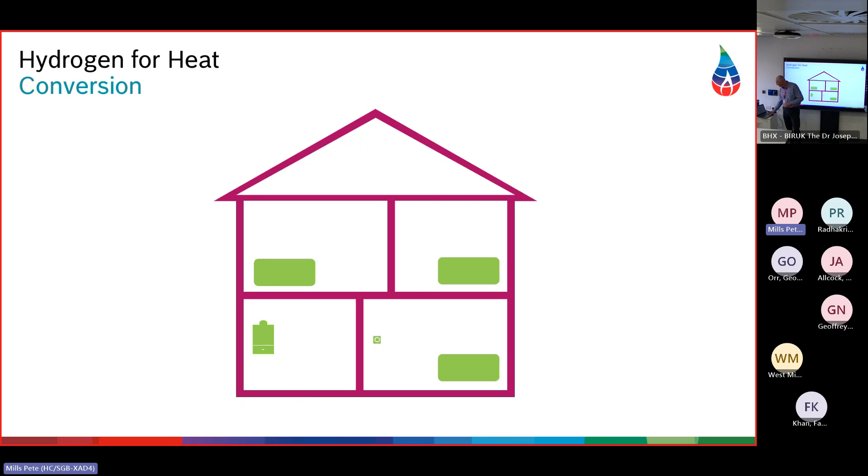Now, if we had a technology that kind of got around all that, then it's sort of interesting to look at if we didn't need to do that massive change. We've got challenges as well as we step away to look at the wider network and what we need to provide in energy terms. Now, this is a little jerky, but hopefully it's going to get there in the end.

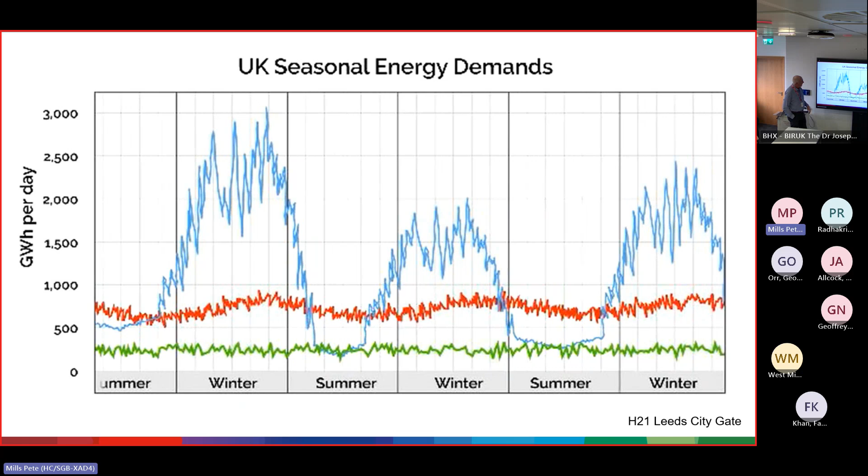This is essentially multiple years of energy requirement for the electricity grid, which is the red line here, which you can see is fairly stable. There's not an awful lot of seasonality, really. It's a little bit of swing, but it's not a great deal. In comparison, we have these massive peaks and troughs on the gas grid. Huge seasonality, which the gas grid just copes with.

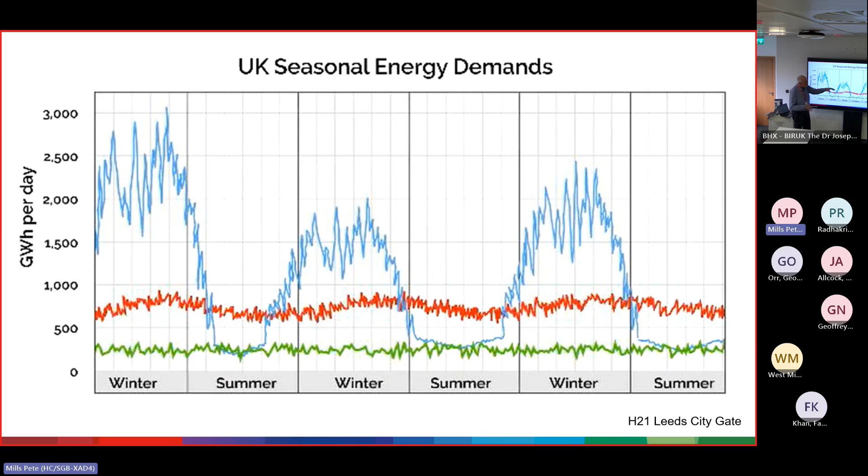When the beast from the east hit us, it would actually be off the graph. It was, I think, 3,800 gigawatts at certain stages, and it was reckoned at times 90% of the country's energy was coming through the gas grid because all of the CCGT turbines were kicking in to bolster up the electricity grid as well. So we've got to have some kind of capacity to deal with this. We've either got to shave off these peaks, or we've got to replace this buffering capacity that the gas grid gives to us with some other technology, which is all cost.

And we have challenges at a local level, at the street level, we have similar kind of peaks and troughs. We have typically these peaks in the morning when everybody gets up and they want their house warm, and then at the end of the day, they come back and they want it again, these big peaks and troughs. Again, gas grid copes with it. They have all sorts of strategies like line packing, where they actually pack more gas into the local grid, and that copes with these peaks and troughs.

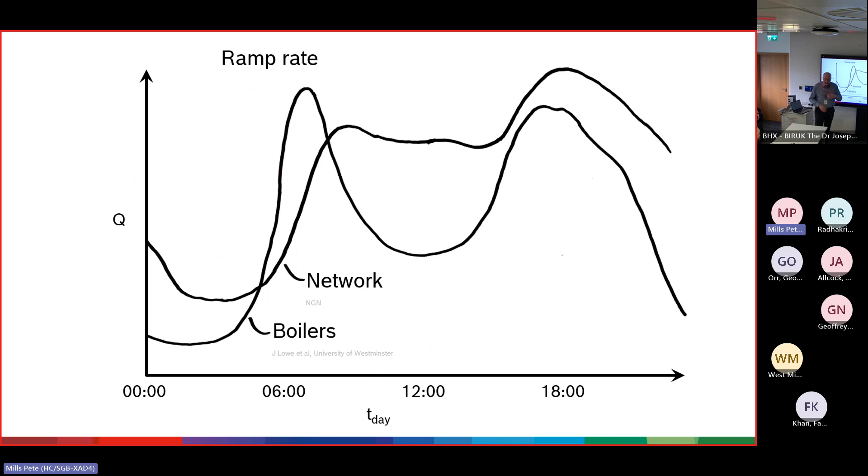So a lot of the distribution network operators on the electricity side are really still a bit unsure about what's coming on to their grid at a local level. How many heat pumps, how many EVs are going to come on to my local grid? And so this again is acting as a bit of a barrier, because particularly for us on the commercial side of things, it's becoming quite a problem in certain areas to actually get the connections you want. And if you're looking to go off grid and maybe you need 3-phase, then that can be a real challenge, and that can scupper your project before you start. So again, we've got to tackle this problem if we are going to be able to get really forward with heat networks.

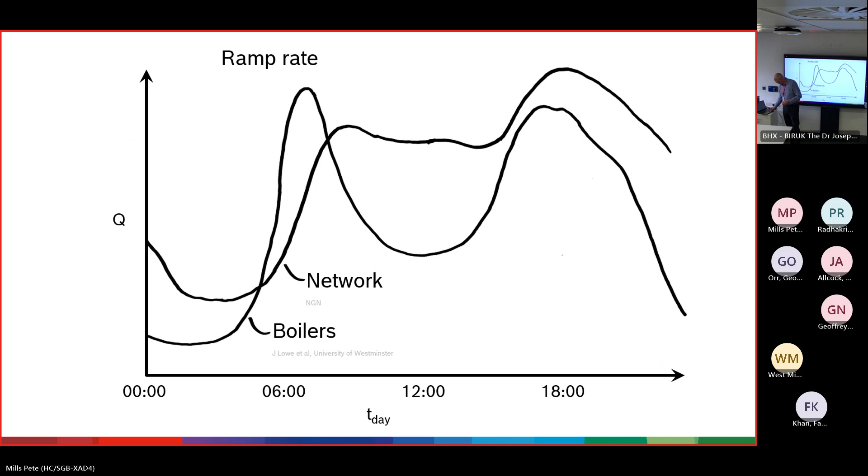Now, I want to just go back in time a little bit. Around 2013, we had the first heat strategy documents come through from government. And it was pretty much an all electric future that document set out. And there's no question about it, it put the gas industry into a bit of a spin, thinking, well, what's the future for the gas industry? We've got this £40 billion worth of asset in the ground. What are we going to do with the future?

Just as a side note, if we wanted to switch it off, it would cost us around £74 billion to decommission the gas grid. That's without thinking about pensions and things like that for people working on it. So it's a massive cost if you just want to switch it off. But anyway, the gas side was in a bit of a spin, thinking, right, what's the future of the gas grid? Could we do anything? And so the obvious thing was, could we have a decarbonised gas of some sort? And hydrogen is the most obvious way to do that. And some of the earliest projects, and this one here, H21, is still a live project.

This still goes on, but this is one of the earliest ones. It was thinking about, right, could we look at a city and actually convert the gas grid across to hydrogen? And so they chose Leeds for a number of reasons, really. It's the 3rd largest city in England anyway, so it's quite a big thing. It's quite sprawling, and I think the thoughts were, well, if we could tackle Leeds, we could probably do a lot of other cities. We could roll it out.

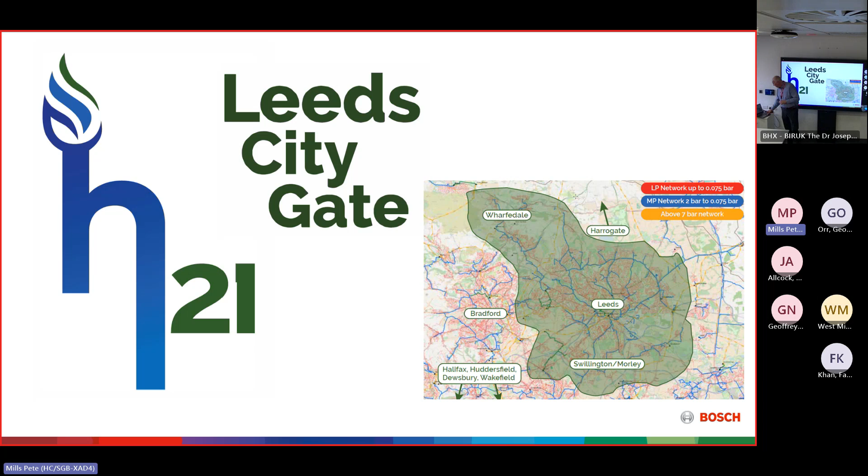So what they had in mind was to take the existing system and put in a new kind of local transmission system with hydrogen. It would take its hydrogen, and this is a controversial bit, I know, but it would take it from a steam methane reformer plant. So this is what we call blue, not where we want to be, not the best way of doing it, but kind of a pilot project to see whether you could do this.

So essentially what goes on here, you take methane, you split it into hydrogen and carbon, you capture the carbon and you sequester it off into some caverns in the North Sea or decommissioned gas infrastructure out there.

Now, the other thing that was useful for the Leeds area was there's some salt caverns out towards Hull, and they could use this as a kind of storage system, because if you're going to do a smaller discrete network, then you haven't got that massive buffering capacity that I was talking about earlier on that can soak up the peaks and troughs. So you need some kind of storage facility.

And so the caverns that they've got there would give something like about 40 days' worth of capacity. And so if something like the Beast from the East hit you, you could cope with that and get over it. And it also allows the SMR plant to just kind of run through the summer, building up capacity, and away we go. So this is still a live project, like I said.

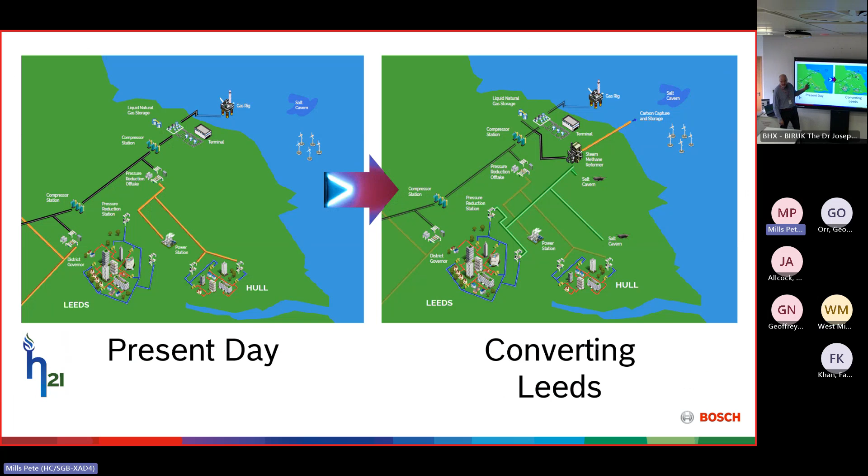What was that project called, sir? Sorry, the name of the project? Leeds Citygate H21. H21. Yeah, you just put in H21, it'll be there.

So what we're talking about here essentially is a conversion. And we've got a precedent for this because there was a conversion in the 1960s and 70s across from Towns gas, as it were. And interestingly, Towns gas actually had a very high hydrogen content, something like 50–55% hydrogen. So this is almost a sort of back to the future solution here. But they converted across from Towns gas to natural gas at the time. Massive undertaking.

But it has to be said that it's a simpler proposition then. The entire gas network was owned by British Gas. It wasn't split up as it is now. And appliances were a lot simpler. It was mainly cookers and gas fires and the odd water heaters and things. There weren't many boilers and stuff like that. So it was a lot simpler. But it does give us a couple of useful precedents.

And the first thing is that the way they did the conversion was actually district by district. Now the gas network is still set up in this way. So you can turn off certain areas, you can do a conversion in an area, and then you move on. So it's kind of a useful thing to understand.

And the second thing that's quite useful is that the way they actually did the conversion was that they just came in and changed a few components on the day. So in the early days, that was burners, injectors, things like that, and they could do it on the day. And so that made the whole thing practical and doable. And it's useful for us to remember how that was done, because that gives us an idea about how you could do it if you so wanted to.

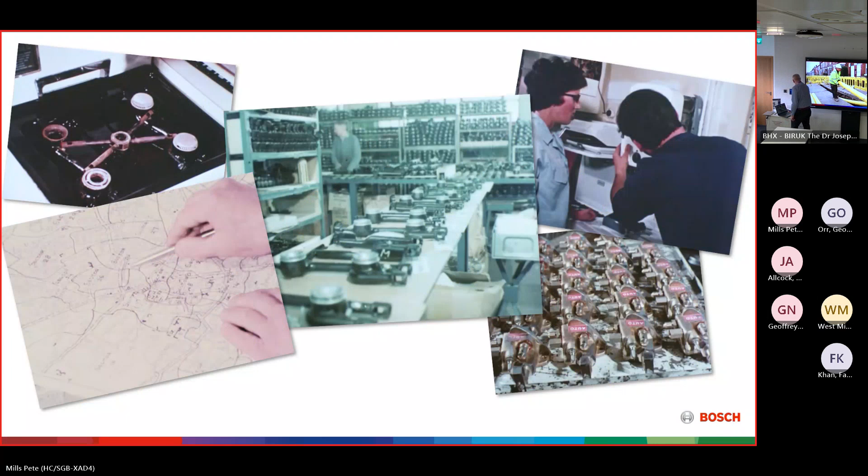One of the other things we've got in our favour in the UK is that we've got one of the most extensive gas grids. Probably Holland is the nearest to us, but they're still some way behind. But one of the key things that makes it quite interesting for us to look at is that we are well into a programme of replacing all of the old iron mains, which wouldn't be suitable for hydrogen. So the yellow PE pipe you see going in is suitable for hydrogen.

And that programme is, I think, around 70% complete now. So there's still a bit to do, but it's 70%. And so that gets us really from the street into the house, pretty much ready for hydrogen, other than the meters, which would have to be changed. But gas meters, like other meters, are part of a replacement cycle. So you can imagine you set up a replacement cycle ahead of doing conversion and you get the right meter in there ready for when you need it.

And so that gives us a significant advantage, because if you didn't have this, you'd have all the extra cost of having to do this on top of trying to do a conversion. It'd probably be out the window.

So where we are today, really, I think we know that we are going to have a hydrogen economy of some sort. The question is really how big that hydrogen economy is. We know that we're going to need it for certain areas like industry, where you need high temperatures, definitely. And if you look at the latest government hydrogen strategy, it's already outlined that that really is the solution for industry. So you could say, well, maybe you'll have clusters of hydrogen, a bit like the cluster that's going on in the northwest, HyNet, where you've got some industrial sites that are going to benefit from that.

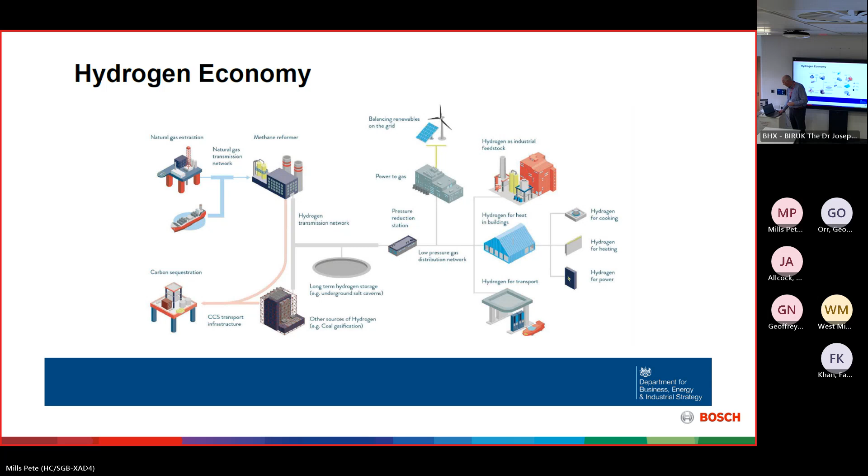Now, if you're going to do a conversion, you've got to create your hydrogen. And I think this is where a lot of the controversy has been over the last year or so, really, about how much extra capacity you need from wind turbines to do this. And you will see all sorts of information out there that leads to massive figures. And I'd like to say this is finally being put to bed by the recent studies that have been done, very recent.

And really, this has looked in depth at how you do this, because the thing to say with this is that there is an efficiency penalty. If you want to do hydrogen, there's an efficiency penalty. It's not as efficient, as I said in my statement at the beginning about heat pumps. That is the most efficient way to do it, no question about it. But if you can't do that in time, then utility has to be considered. Otherwise, you're never going to hit your targets. So this is the penalty. This is what it would take to do it.

If you wanted to do the entire gas system as it is today, we've got something like 22 million homes connected to the gas grid. If you wanted to do the entire thing, you'd need about 80 gigawatts to do it. Well, what this particular study considered was that we are probably unlikely to do the entire UK population of gas connections. We are expecting there to be significant numbers of heat pumps.

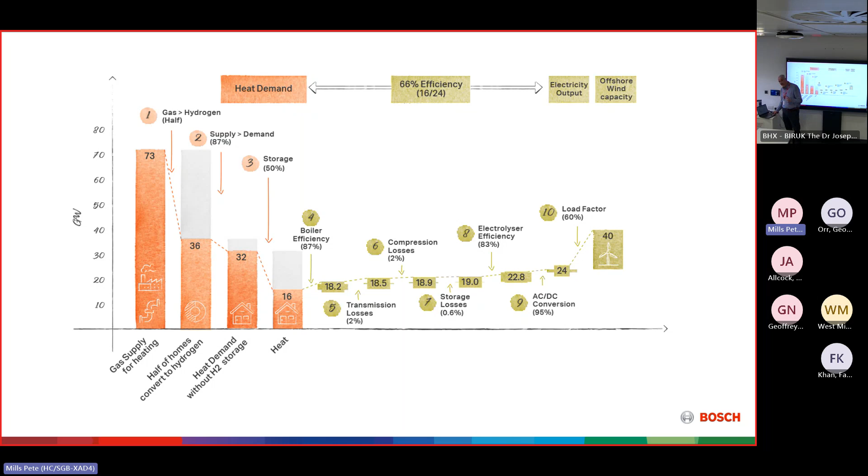Now, that contrasts with some of the early statements on this, where the figures were something like 385 gigawatts, but the incorrect figures have been used. And there are a lot of people out there that are very anti-hydrogen. So I totally get it, we want to go the most efficient route. But we need to stick to the right figures. Otherwise, we're not going to be informed properly in what we do.

So where are we with hydrogen production in the UK? Well, these are some sites that are actively going on. The British Energy Security Strategy initially committed to 5 gigawatts of hydrogen by 2030. When the Ukraine crisis kicked off, they doubled that. They went to 10 gigawatts. So that's what they're committed to at the minute. And half of that will be electrolytic, so it will be green hydrogen.

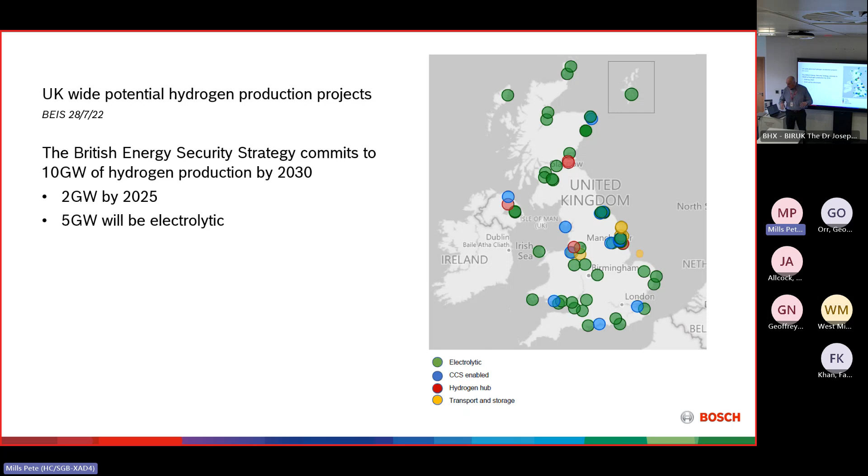The target at the minute is to get to 2 gigawatts by 2025. So you can start to do some things. These are early sites, and you can see the capacity is starting to build up. And we're going to need this whatever we do. Whether we decide to do a transition or not, we will need this. And there are a lot of others, too many for me to put on here, but I just wanted to pick this one out, which I think is very significant.

The gas industry has got a fairly well advanced, mature program for how it would do a transition across to hydrogen if it needed. And one of the key elements of this in the early stages is Project Union, which is really a kind of hydrogen backbone to get hydrogen distribution across the various areas of the country, but also potentially through Bacton, which is where I live, across to Europe to hook up with their hydrogen network.

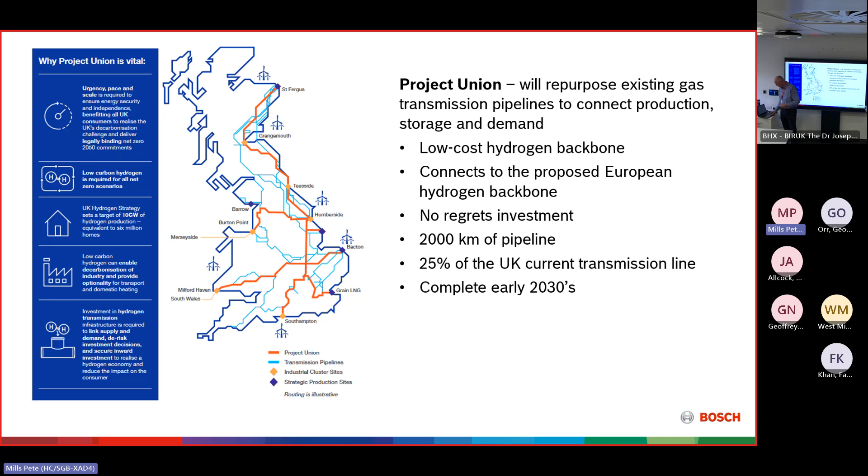So, some figures on here about what it's all about. But what they're really saying is that this is a kind of no regrets investment, because we will need this come whatever, because we will need clusters, so this is good investment. So if you look up Project Union, there are a lot of these different things going on, too many for me to mention. But the point is, the gas industry itself is quite advanced in getting down the road with this, so that if there is a decision, it can react to it and do what it needs to do.

Okay, I want to come away from the network side for a minute, because the other thing we need here is some appliances, don't we? If we're going to do this, we need some boilers and cookers and whatnot. And so Hy4Heat, the program we were very much involved with, the reason for it really was to try and give government the information it needed to see: was this even possible? Could we do this? Is it safe to do it? Can we get appliances? Can we do meters? Can we do all the stuff that we'd actually need?

So this program's actually finished now. It started back end of 2018, went right through COVID, and still managed to keep on target amazingly. It was split up into all these different work packages. There were things here to do with standards. So the Institution of Gas Engineers made a standard for hydrogen quality, known as H1. BSI created PAS 4444, which was a certification standard so that manufacturers like yourselves could create appliances certified properly that would then go on to proper community trials, and that's the next stage.

We were involved with work package 4 mainly, where we produced prototype combi boilers, system boilers. We were also involved with work package 5, which was commercial. The only company that actually demonstrated a commercial cascade of appliances for that area. And then work package 6 looked at industrial. That was mainly a desktop study.

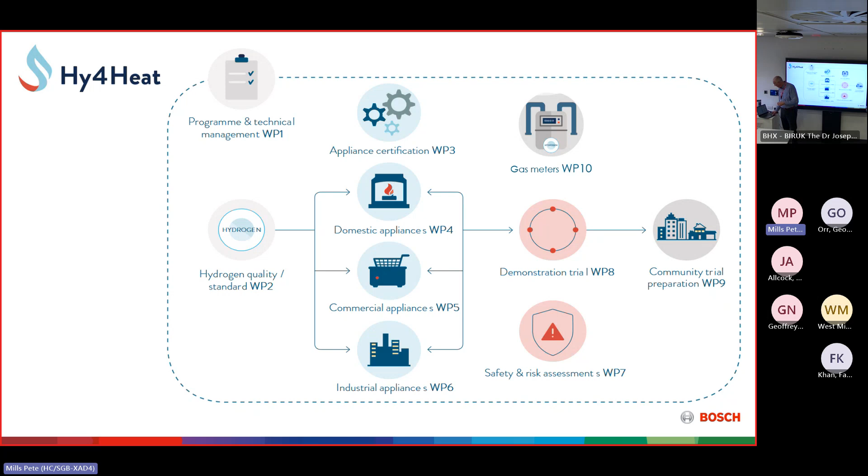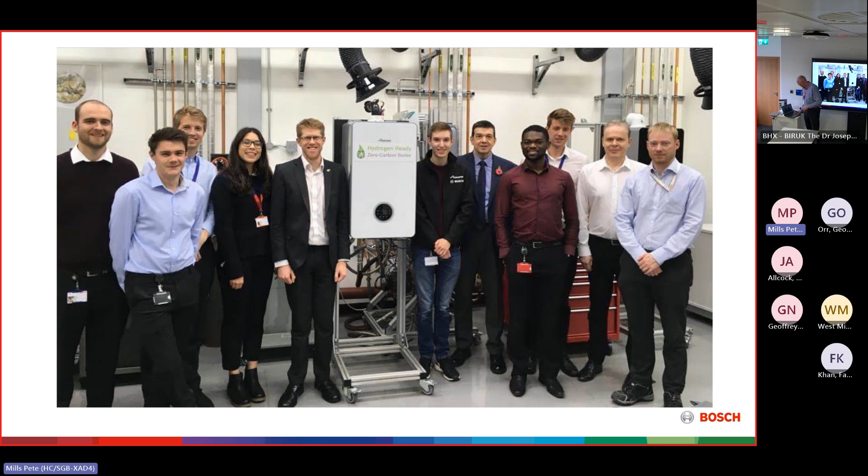So we produced this appliance and it went out on the demonstrator trials. This is up at the Spadeadam site in Cumbria, and it's been on there for well over a year, chugging away at hydrogen, and as you see, it looks like a boiler. There's nothing different with it. It's running on hydrogen instead of natural gas. And there's a number of these sites. There's one up in the northeast, where they've got a demonstration hydrogen home. We've got it running up there.

So this sounds very easy. We did it, it's out there. But there were some challenges. The characteristics of hydrogen are quite different to natural gas in a number of key respects. Flame speed is quite high, so you have to really engineer out any issues around that. Flame temperature is a little bit higher, and we were a bit concerned when we started the project whether that would lead to higher emissions, particularly NOx emissions, because generally NOx emissions in boilers are related to temperature. As it turned out, which I'll tackle later on, it didn't happen to be the case. It went the other way.

The other thing with hydrogen, and this is something that people fixate on, is that the calorific value is a lot lower. And a lot of people say, well, you can't get that through the gas pipe. Well, you can, because what matters is Wobbe. When you look at the different gases, Wobbe is the key factor, and Wobbe is made up of calorific value and the density. Because the density of hydrogen is a lot lower, there's a cancelling out effect. So this tells us, by and large, we can get the amount of gas we need through the transmission system. That's the key thing. But as I said, there were challenges.

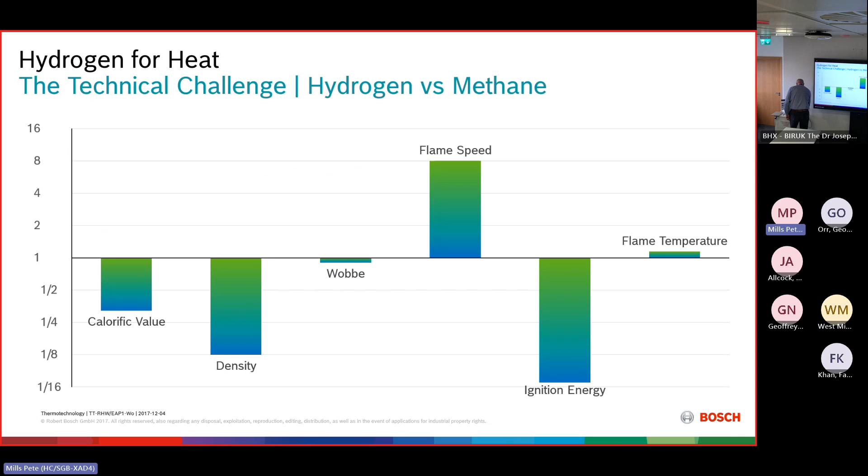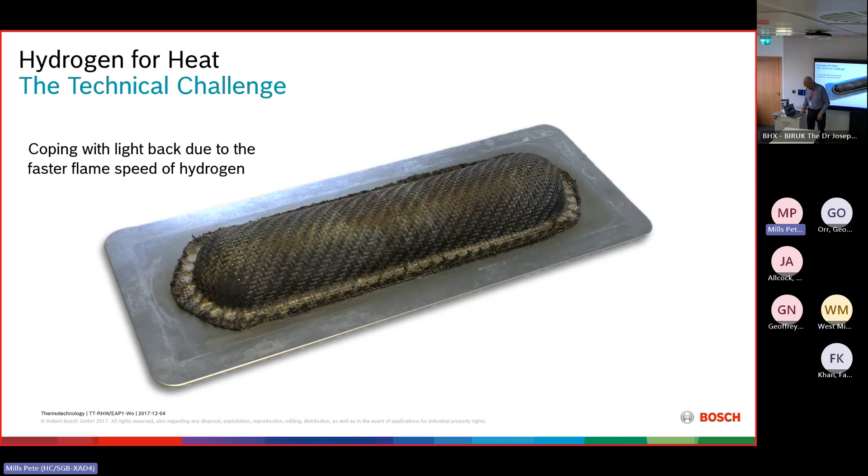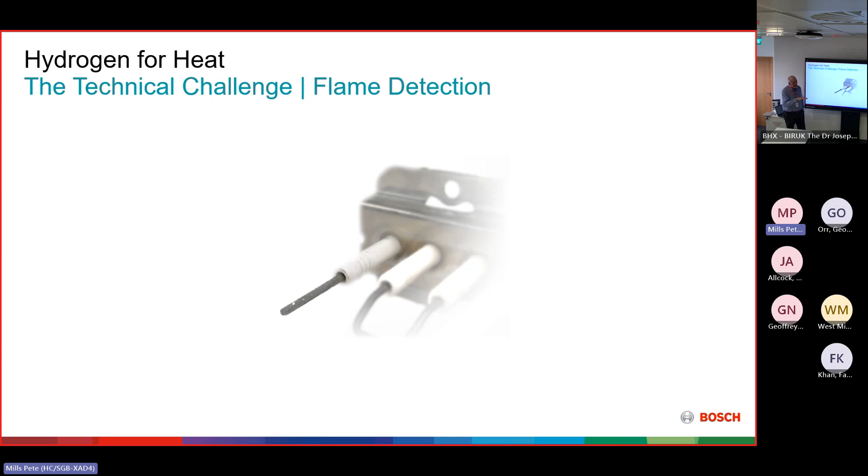Not really a new technology. We need to go to ultraviolet detection. It's been used in the combustion industry for many years, but we had to get it down to the size that we needed in a domestic boiler. So that was quite an engineering challenge.

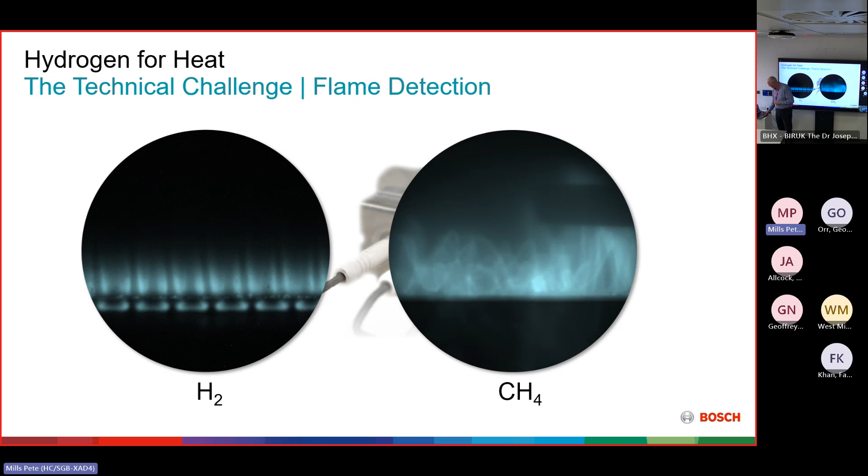So as I said, we've done it. The appliances are there ready. It's not to say that there's still development that will go on, because as with all appliances and things, you need to keep them going forward.

But I wanted to slightly digress for a few minutes and just look at another government-funded initiative for hydrogen. And this is HyDeploy. HyDeploy is all about blends. It's about looking, could we do blends up to 20% in the current system as it stands? And the reason is that

if we're going to get a hydrogen economy going, particularly around this area, we need a market for hydrogen that's quite large. And so if you could start to blend hydrogen in with your natural gas, it's kind of a natural off-taker of any hydrogen production. Those sites that you saw earlier on that have been built up, if you've got no market, the investment will go away from it. So you need to start up something.

And that's the whole idea of HyDeploy, really, that it would allow big capacity of any hydrogen production to come into the grid, and it could be used. And that's a key thing to break that chicken and egg cycle, really.

And I've got a video on here now. Hopefully it's going to play, but it's actually showing you what happens when you've got a burner that's running on methane, and then you put 20%, or 23% in this particular case, and it's running a little bit jerky. It's counting down. Is there audio? No. And you might have seen the flame just tightened up slightly. It was quite a high flame before it tightened up a little.

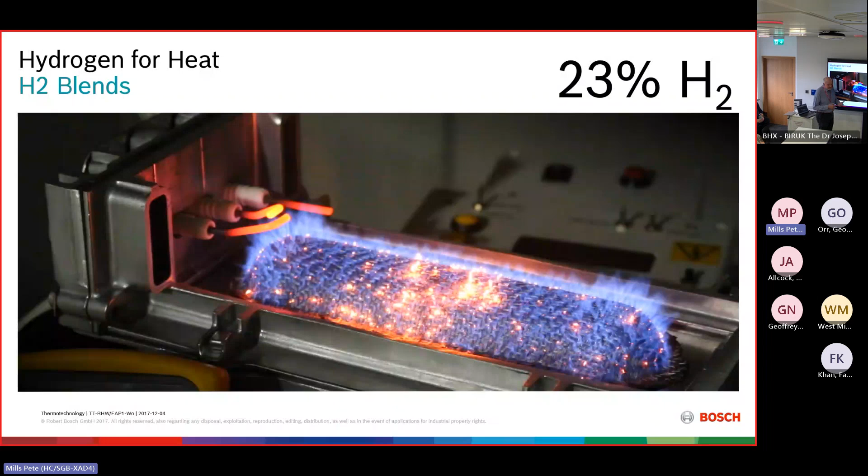Now, all appliances that have been certified since the mid-90s really have had to go through this test where we put a limit gas on, and it's equivalent to adding up to 23% hydrogen in there. So they've all had to be certified on that already.

Now, sometimes there's a bit of uncertainty amongst consumers about that. And so you might see on certain advertising this 20% blend ready. It's really to try and inform consumers, because we've had a lot of questions about it, but it is what it is. You think the existing appliances, right now, are perfectly fine with it? Yeah. No need to retrofit, probably in the vast majority.

There might be some very old appliances. There might be some industrial applications that would have to do that. But for the vast majority, you can put 20% in. And why only 20%? Well, it comes back to that ionisation problem. If you go over 20%, you start to have issues with ionisation, you have nuisance lockouts, all that type of thing.

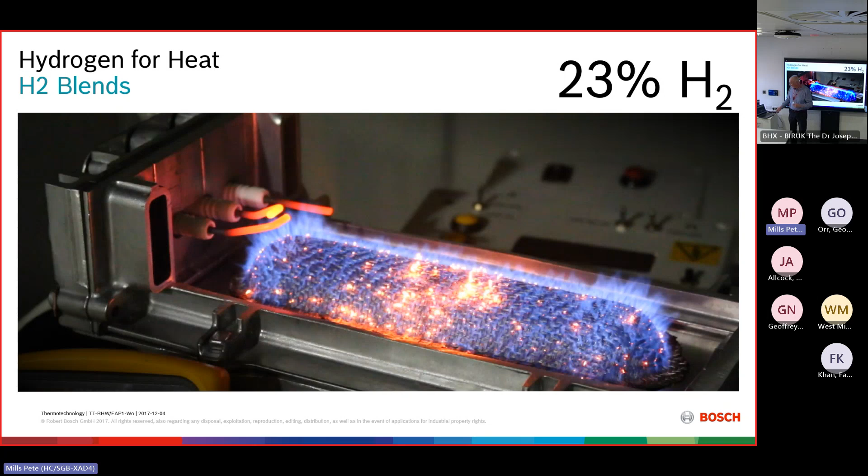No changes to flanges? No changes. Gaskets? Yeah, you just inject it, it'll go literally from 0 to 20%. So it's not like overnight you go to 20%. It could be anywhere between 0 and 20% on any day. It will fluctuate, but the appliances can cope with it. That would be to develop the market for the hydrogen being produced? Yeah. That's the idea.

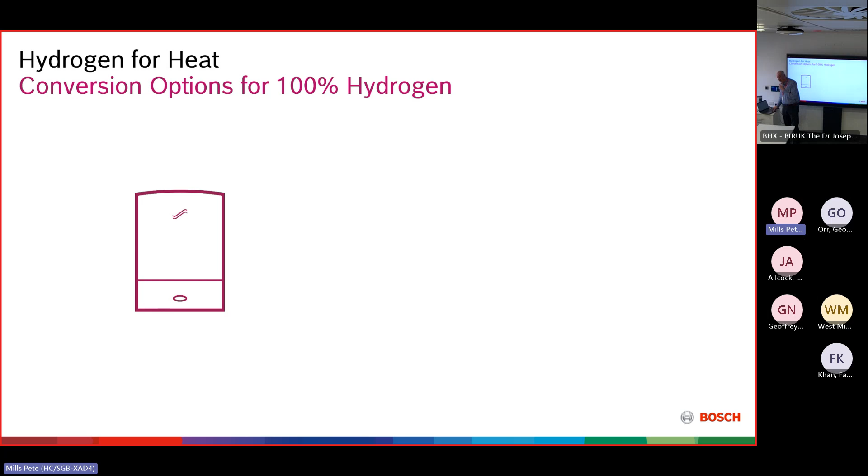So what does this give us? Let's think back to where we are now. If we wanted to do something like Leeds H21 in the future, and maybe other cities, we could decide with appliances that on the day of the conversion, we change the whole appliance. You know, we swap out a boiler and we put a new boiler in. Quite time consuming.

It takes a day to do a boiler, and it creates some weird effects because if, like, Leeds and everybody had a new boiler, not on the same day, but within a time period, then they're not going to need another boiler probably for another 10 years. And what are those installers going to do for the rest of the time? It's just not a practical thing.

Now, oh, there you go. My animation did come in.

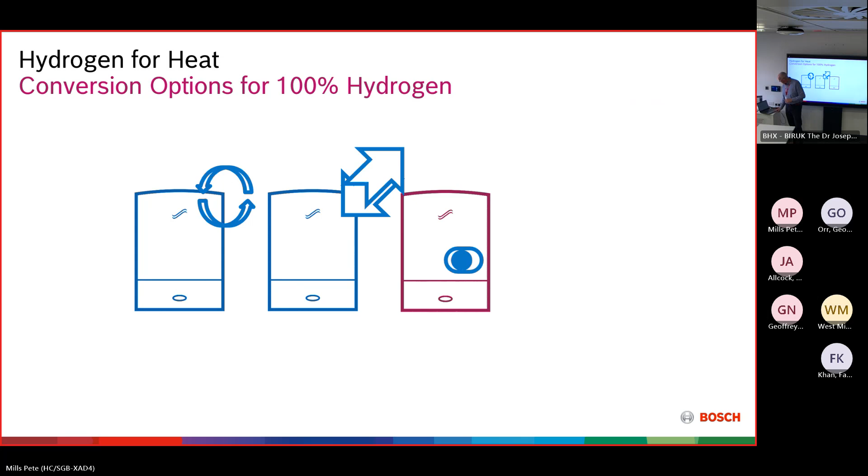It is theoretically possible that you could produce an appliance where you come in and you flick a switch and it goes from natural gas to hydrogen. Theoretically, you could do it. But this adds an awful lot of cost to the appliance. Imagine you want to do some pre-population of appliances out there, hydrogen-ready appliances, and you add a massive cost to lots of appliances that may never get adapted or converted in their life.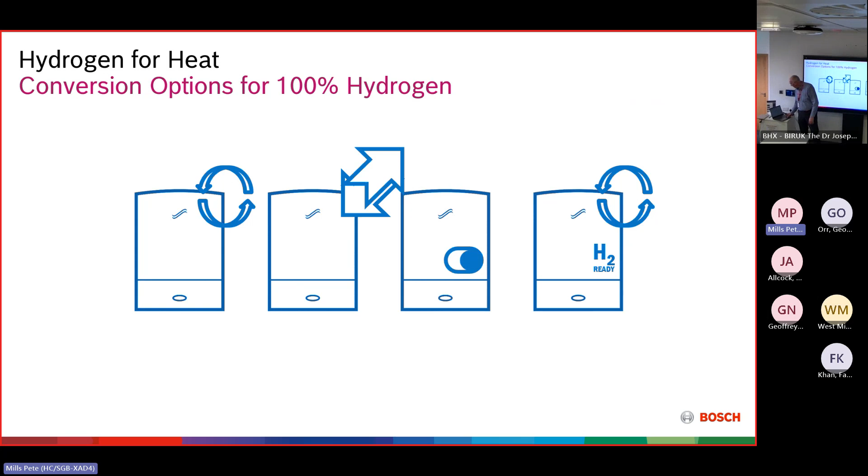Doesn't make sense. So the method that does make sense is to have a hydrogen-ready appliance. This is an appliance that is really a hydrogen burning appliance, but it's converted back to work on natural gas because it's far easier to do it. And so what it does, essentially, on the day of the conversion, the clicker's not quite working right, but I think it's coming up.

You might have to come in and change a number of components. Now, I don't know exactly what that might be. I don't think it will be a burner. It may not even be a gas valve. It might be some components of a code chip or something in there that you come in and do within an hour or so. This is much like how it was done in the 1960s and 70s. You do that conversion on the day, it takes about an hour and you're up and running on hydrogen. And what this gives you is scalability.

Because at the minute, there are about 1.6, 1.7 million gas boilers sold every year in the UK. So if you wanted to do a pre-population, let's say we got the go-ahead in 2026 or 2027 or whenever it came, maybe within about 14, 15 years, you could convert pretty much most of the UK across to hydrogen-ready appliances. And so you've done a kind of no regrets policy. And this is really, I think, the thing that's perhaps attractive to government, that this gives you a kind of insurance policy. Because if you don't hit your targets with heat pumps and heat networks, then you've got the possibility to do this.

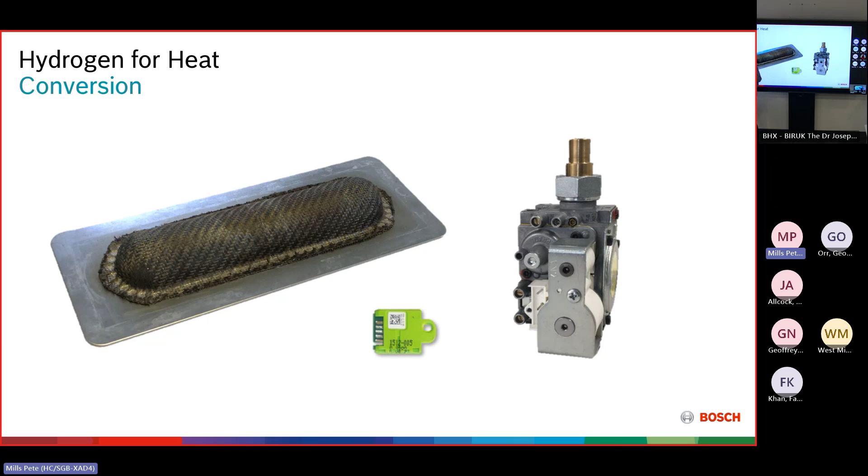So there's several consultations around this. It was part of the boiler efficiency consultation we had last year as well. There were questions in that. And at some point they've got to make a decision. So all this is good, but there's no way you can do this if the thing's not safe. We have to prove the safety case. As I said to you, there was an awful lot of work done through Hy4Heat. That's where the main program of things was done.

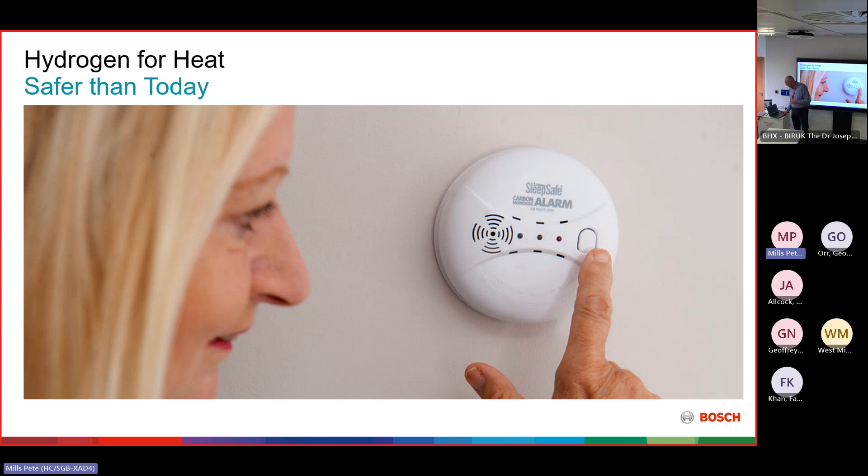What we do know at the minute is the vast majority of serious cases involving the gas grid at the moment are not actually explosions. There are some, which is pretty much the thing that we think about. But actually, the vast majority of fatalities certainly are down to carbon monoxide. That's why we have these high-profile campaigns around carbon monoxide. Now, when you burn hydrogen, you've got no carbon in the gas, so it's impossible to get carbon monoxide. So that is a massive leap forward in terms of safety. But of course, we need to know what happens when you have leaks, when you have build-up and things like that, because one of the characteristics of hydrogen is what we call the flammability limits.

They're much wider than they are for natural gas. And what that means is if you get a build-up of hydrogen, it's more likely to go bang than it would do if you had methane, because of the percentages. And this was really one of the key bits that was investigated through Hy4Heat by Kiwa and HSL.

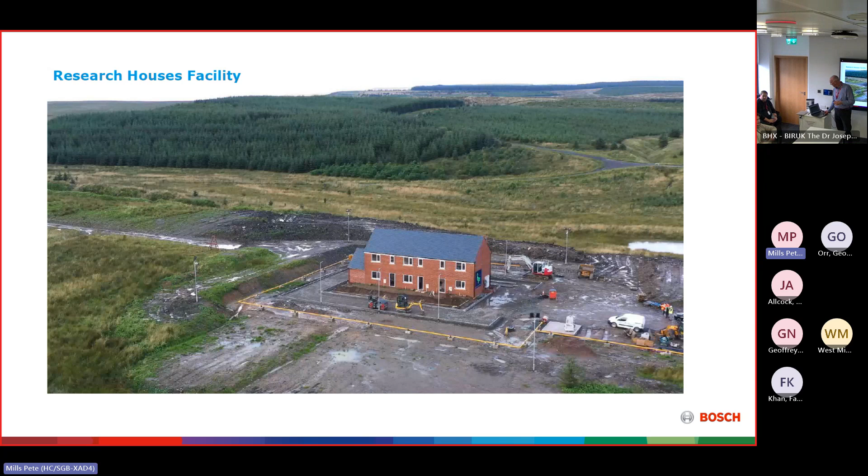So they did a number of tests, including buying a cottage in Scotland somewhere and filling it with hydrogen to see what happens. What happened? Dense escapes. No damage, no explosion. No, it was okay. But also they built these brand new new-build houses, to be honest, and the reason these were done is because this is kind of like the worst case scenario, if you like. They're very tightly, airtight homes, and so essentially they built these places. They created all manner of different types of leakage to see how would hydrogen build up, what would happen, where does it interact with your flammability limits and things.

And the conclusion they came to was essentially that if you've got a good system under natural gas, you will have a good system under hydrogen. It was a bit of a surprise because the flammability limits didn't build up to what we thought, mainly because hydrogen is the smallest molecule there is. It is very searching. It's very difficult to contain at times, and so it just found its way through any little gap. And so the way it built up was roughly equivalent to what you have with natural gas. So the conclusion of Hy4Heat really was that there is no increase in the safety risk from natural gas to hydrogen, and that's where it is at the moment.

Now there's a lot more work going on because we need to know what happens with the transmission system. So up in Spadeadam again, they've got this little gas grid where they're taking old elements out of the gas grid at the minute, 30-year-old valves and things like that, to see what happens when you pass hydrogen through it, what your leakage rates are, things like that. There's also a lot of work going on over in Buxton, HSL's labs there, where they're doing similar tests to find out. So there's still more work to be done here, but where we are at the minute is that the safety case, as I say, is on a balance with methane.

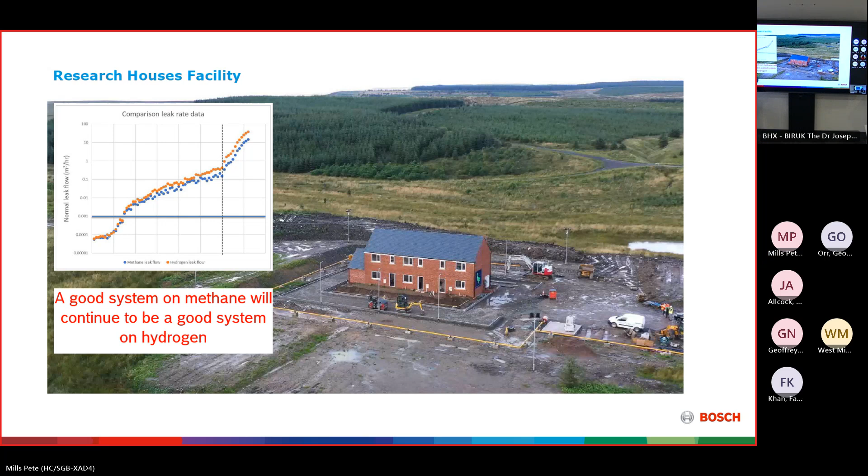Now, I just want to come back to something quickly I said earlier on about the concerns we had when we started our project about whether we would get higher NOx emissions, because whatever solution we have, we do not want to be impacting air quality. We don't want to be having the worst situation when it comes to that. And so we were concerned about that. But actually what we found was that when we moved to premix burner technology, and that's the kind of technology you've probably got in your combi boiler at home, it's nothing different, the NOx levels came down, and they came down significantly. Came down to about half of where we are with our ultra low NOx natural gas boilers at the minute. And that was a welcome surprise. It wasn't something we expected.

And to be honest, we didn't really understand the science behind that in the early days, but we worked with a couple of universities to try and understand what was going on there. And it turns out it comes back to the flame speed. The flame speed is so quick that it affects the dwell time in the combustion chamber, so that really reduces your NOx emissions. So a really significant thing, because if that ended up being much higher, then that really would have scuppered things, I think.

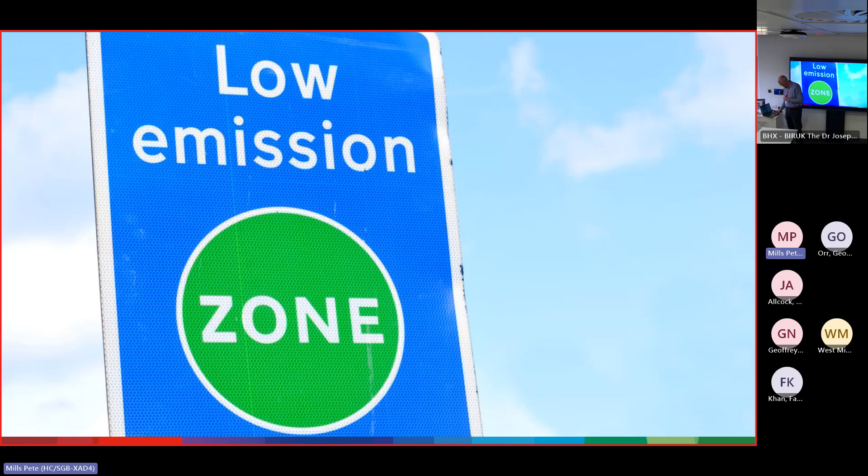So where are we today? Well, I think we're in a phase where we're waiting for decisions, of course, but there's also a lot of backfilling going on with consultations and standards and the like. So we've had numerous consultations around hydrogen. I could have filled this up about 2 or 3 times, but I just picked out a few. This hydrogen strategy is the key one from government. This is where they commit to the decision in 2026. This is where they identify that the industry that needs high temperatures will be using hydrogen.

We have a whole low carbon hydrogen standard now, which is really for green hydrogen. Are we producing it at the right levels of carbon, and is it sustainable? So that's in place. We have very recently this kind of final consultation really on blending. Will we go ahead with blending or not? That was promised, that we would have this final consultation this year ahead of making a decision on it. I think, barring some unforeseen thing, it's highly likely that that will go ahead. It's unlikely that they will do something now.

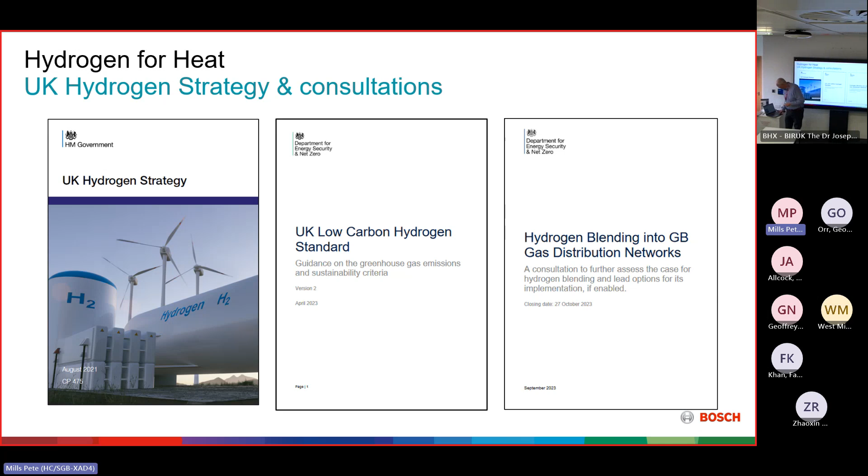We have further standards. Oh, sorry, I've gone too far. Is it? Okay, good. I've just put this in here.

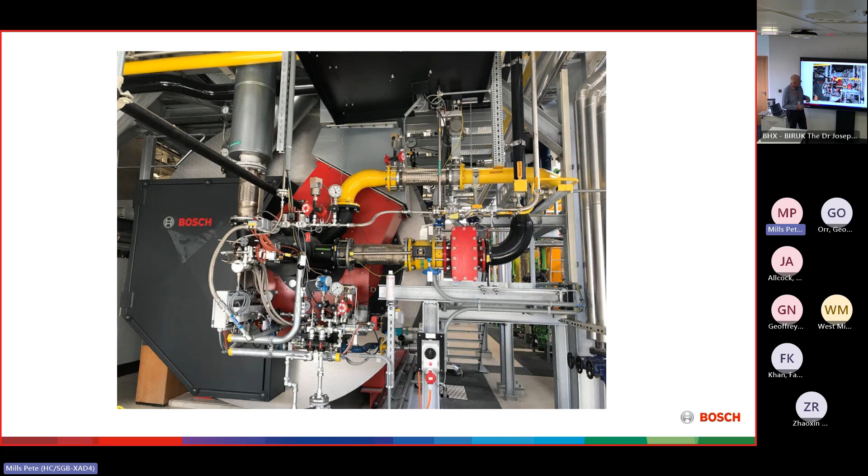So these standards are really backfilling where that void of information is at the minute, along with other standards that IGEM and others are doing, because they're really looking at all of their suite of standards and saying, right, what would we need to do in here if we convert to hydrogen, and steadily going through that.

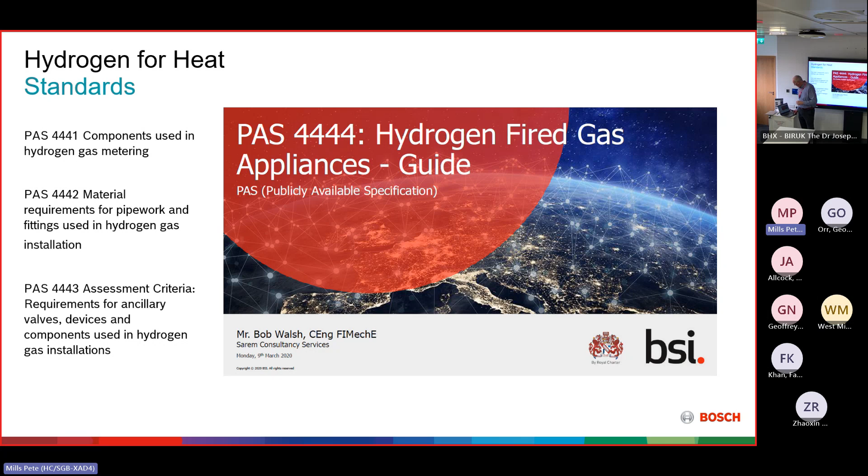So, yeah, I hope that was of interest for you. I think the next few years are going to be interesting with this. My plea to you would just be, keep an open mind on this. Take into consideration what I said at the outset. We know what the utopia is. We would love to achieve that. But can we do it? For me, personally, it comes down to how important we think our 2050 targets are. We've got 27 years to hit it. If we think they're crucial, then unless we do something utterly radical with heat pumps and heat networks, we are not on track to do this.

And as I've said a number of times, this is the kind of insurance policy, we should think about it like that. This is not technology for now. This is technology of the 2030s, if we're going to do it.